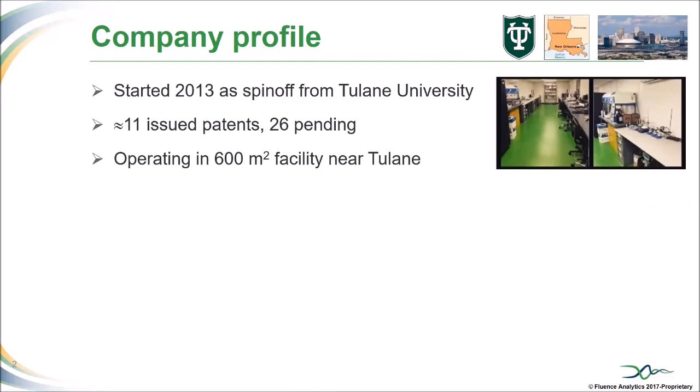So our profile, I've just mentioned a little bit. We do have the IP or the patents that were originally mostly developed in the Tulane period. Those have been obviously contributed to the company. We are in New Orleans, very close to Tulane University, just a few miles away. Our facility is about 6,700 square feet, and we have here a team of nearly 20 people working on all aspects of commercializing this technology.

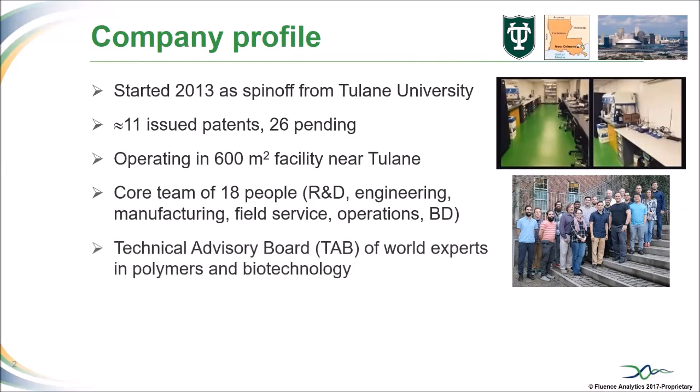Just to mention, because it's not on this slide, we also received a Series A funding round in May of this year, confirming strong investor interest in this technology. Really our mission is to combine a hardware system with advanced software and data monitoring, data processing, analysis in order to provide solutions particularly for the chemical and biopharma industries.

So our products are intended to help you with productivity. I'll just mention we have two main product lines, ACOMP being one of them. The other one we're not going to spend any time on today, except just to mention it right now. It's called ARGEN, which stands for Aggregation Rate Generator, and it's a laboratory instrument that has 16 independently controllable cells.

It uses light scattering to look at things like protein aggregation, or it could look at degradation of polymers, other natural products. This product is mainly targeted at the biopharma industry. So just a little footnote here to say that's one of our product lines.

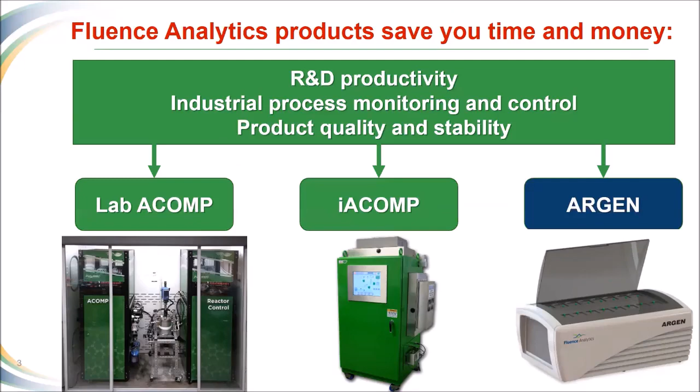So the main problem faced by the polymer manufacturing industry is really one of understanding what is happening, what is going on in the reactor, what you are making. As a matter of fact, I started my career more than 30 years ago now, and my first job out of school, I was involved in the rubber industry, and we would be running a measurement called the Mooney viscosity. So the way it worked is you would take your sample out of the reactor, run that over to the lab.

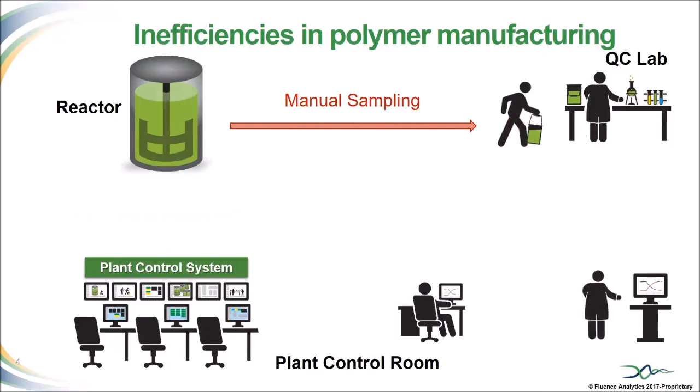You would then have the lab generate the measurement after a certain point, run that back over to the control room. And of course, this is a fairly inefficient way of really understanding what is happening. As it turns out, we are now in 2017, and nothing has really changed in this picture since that time - the Mooney measurement is run exactly this way by the rubber industry manufacturing polymer. So this is the inherent inefficiency that is very common in polymer manufacturing.

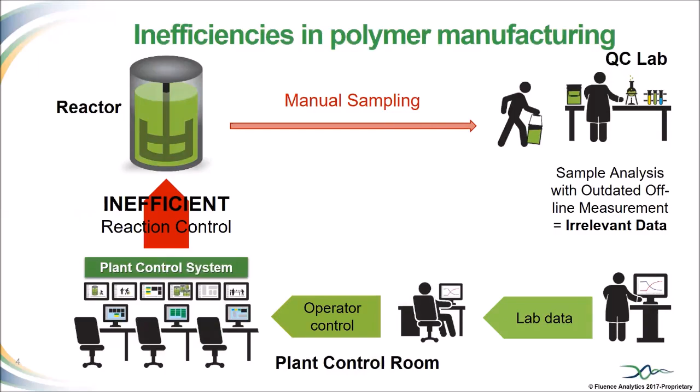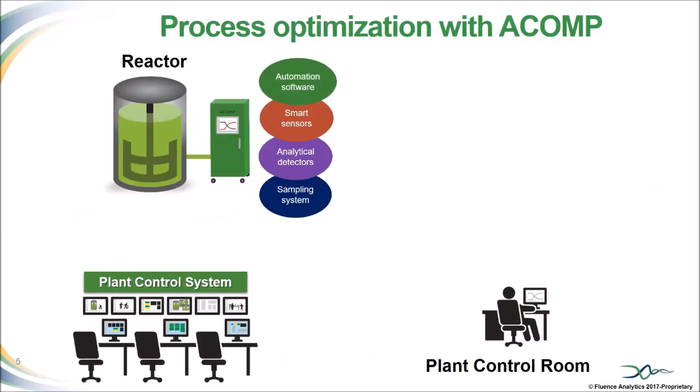So what does ACOMP bring to that? Well, ACOMP must be directly connected to the reactor, as we show here. And when that is done, using the internals of the ACOMP - the sampling system, detectors, sensors, and software - we are able to generate continuously, automatically, and in very close to real time, raw data. That data is then processed using our internal algorithms, which are quite sophisticated, and that data can be supplied directly back to the plant control room, the parameters of interest, whether those be a residual monomer measurement, for example, or a viscosity measurement.

This can be fed back directly into the distributed control system in the plant. So that entire process gives you greatly improved control or understanding of what's going on in the reactor, which can then be used to optimize your control. So the way I often like to talk about it is polymerization reactors are basically a black box, but when you have the ACOMP system, you have a window inside the reactor, and you can actually begin to understand what is happening there.

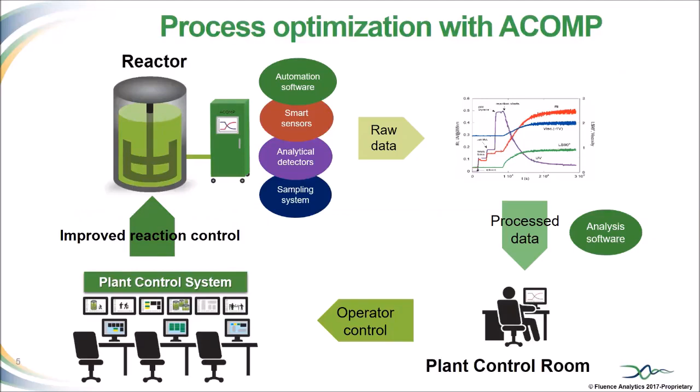So I'll just do the very basic version of how it works, because Mike will come to much more detail on this. ACOMP is, as I said, connected to the reactor, and we continuously extract, dilute, and condition a stream directly from the reactor, and then we pass it through the detectors at a very low concentration. So we dilute that stream generally by a factor of 100 to 1,000 to a low concentration.

Why do we do that? Because our detectors are all relying on the properties of polymers in terms of their interaction with light sources - whether UV or laser light or different types of light. So we need to have the polymers in a mode where they are fully diluted, not interacting with each other and not interacting with anything else that might disturb the signal. So we're really looking at very intrinsic properties of the polymer.

The typical extraction rate from the reactor itself is very small, of the order of a milliliter per minute, so very small quantity. There is some delay time inherent in the ACOMP because we have piping and tubing that extends from the reactor to the ACOMP and then within the ACOMP a little bit too. So there is an inherent delay time there, but compared to the time scale for sending things to the lab, which is a minimum of 45 or 60 minutes and sometimes can be many hours, the delay that is inherent here in the ACOMP is only of the order of 1 minute, maybe up to 5 minutes. So this is essentially real-time measurement.

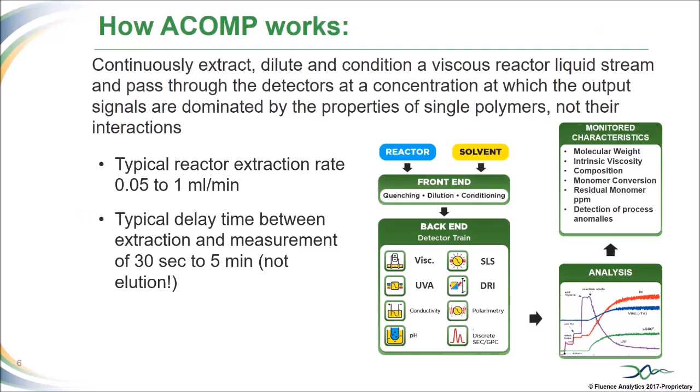We also want to point out, many of you in the audience may have a lot of experience with chromatography, so we want to say up front that ACOMP is not a chromatographic process. We are not putting the stream of liquid from the reactor through columns. We are putting it through the detectors directly, continuously, as I mentioned. So this is a definite difference between ACOMP and typical size exclusion chromatography.

On the other hand, if we wish, we could put GPC or some variant on the end of the ACOMP system. The actual stream that is coming out of the exit of the ACOMP is very suitable for GPC analysis, so that is possible to do, but it is not part of our standard offering.

Just a little bit of nomenclature - what we refer to as the front end in the ACOMP is the first part where we are extracting, diluting, and conditioning that sample, and then we call the detector train part the back end. We have 4 standard detectors, which are UV absorption and viscosity, and then differential refractive index. And our most sophisticated detector is actually the static light scattering that has been developed and improved by Professor Reed at Tulane and Mike Drenski and many people. So that is our most sophisticated detector of the 4.

And we can add other detectors optionally. We could add GPC, as I mentioned, but we could also add other things depending on the requirements of the customer and what you're looking for. So coming out of those detectors, again, we will get raw data, and Mike will explain that in a few minutes.

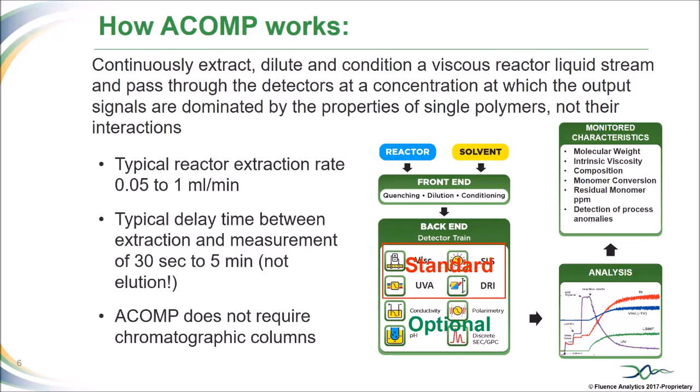Where we see the value of the ACOMP system, basically we like to break it down into 4 categories. We've actually done a lot of quite detailed work to quantify what we're going to talk about here, but basically the benefits, of course, cost.

If it's a batch process, we are typically able to reduce cycle times, and we have a case study to show you exactly how that's done. With continuous process, it's about faster grade changeovers. From an efficiency standpoint, of course, we are going to have less rework in the system, reduced manual sampling, really a lot less analysis is going to be needed if you have the ACOMP running. The data is fed seamlessly into the plant DCS system where it can be used to implement control algorithms directly.

So those are benefits. And then quality, likewise, by being able to control things like the cycle time or the transitions, you can envision having tighter specifications. Of course, you reduce the amount of off-spec product. In batch, we'll show you an example later where we basically avoid degradation when you run the batch reaction too long.

And then last but not least, for health, safety, and environment, we of course reduce manual intervention, so the operators do not have to be exposed to hazards in running back and forth collecting samples of reactor liquid. But overall, for a site, you can envision that using this type of analytical technology, you can reduce the energy footprint, you can reduce the materials consumed, and so there are significant HSE benefits as well.

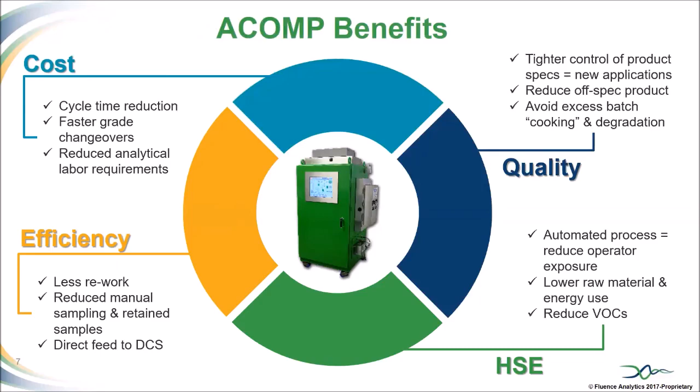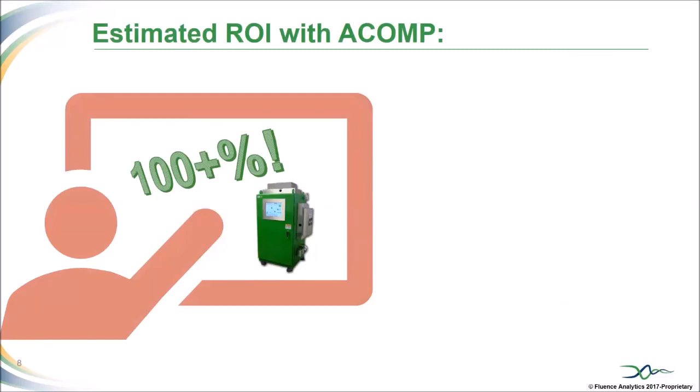So in terms of return on investment, we are going to make what will sound like a quite bold statement here. We believe that using this type of technology, you can quite easily, in fact, generate returns of over 100% return on investment annually, meaning that the payback is less than 1 year, typically.

And why we're able to say that, just to talk about two generic examples here. If it's a batch process or semi-batch, and let's say you have a 20,000 ton plant with a $50 million turnover, the major benefit, to focus on the major benefits, is going to be cycle time reduction, and we can say that it's possible to get on the order of $1 million.

And how do we arrive at that? Basically, if you have a 5% reduction in the batch cycle time and you're able to sell that capacity - it depends on the economic environment you're in, but if you're able to use that capacity - $50 million times 5% is $2.5 million, and then the cash margin, if the cash margin is 40%, that is how we get to that $1 million figure for the batch example.

Very, very straightforward. As I'll mention later, the batch cycle time can be improved by significantly greater than 5% in some cases. For continuous process, likewise, let's say you're running a plant and the annual turnover is around $150 million.

Again, your big nugget there is going to be reducing the transition time where you are producing what's called often twilight material, or basically off-spec grade in between two grade specifications. So if you can reduce that transition time by just 1%, you are looking at on the order of $1 million there. Oftentimes that transition material is sold for less than half the prime price.

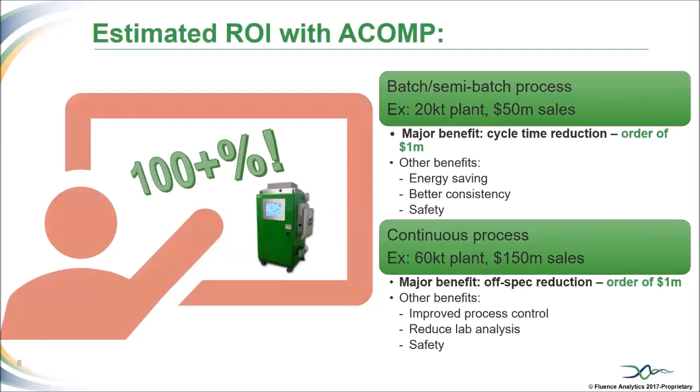So how about the actual industrial performance of the ACOMP system? ACOMP has been in business now for close to 3 years. Our reference example that we're going to share refers to a customer here in Louisiana. It's a global specialty chemical company.

It's making a polymer that is frequently used for water treatment. And we have, with the Generation 1 ACOMP, close to 3 years now of experience with 98%, or really close to full, on-stream availability, meaning whenever the customer is using it, the equipment is available. I mean, if they're down for cleaning or something like that, we don't count that time, obviously.

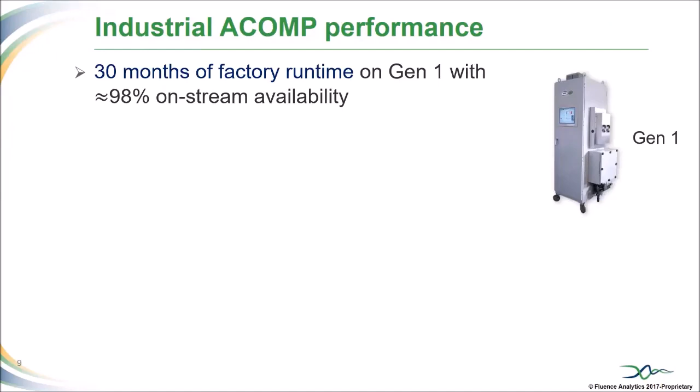Generation 2, so they were very happy with this. Payback was very fast, they bought another unit. This is the Gen 2, lower right corner there. And so they bought that unit, and that unit now has well over 1 year experience as well.

And although I mentioned in the example where you can get very significant savings if you can just reduce batch cycle time by 5%, we have gone back and looked at a lot of the customers' data, which is shared with us.

And we have estimated an average savings in cycle time of about 17%, so very, very significant. Now, the economic benefit of that saving is going to depend very significantly on what you do with that saved cycle time. In a very strong economic environment like we're in right now, you probably can sell all of that capacity. In a weaker economic environment, the savings would be reduced amounts of overtime, a little bit of reduced energy usage, and we have actually done estimates around those things.

So we are only using the 5% number to actually claim the very significant benefits for ACOMP, but the savings can actually be significantly greater.

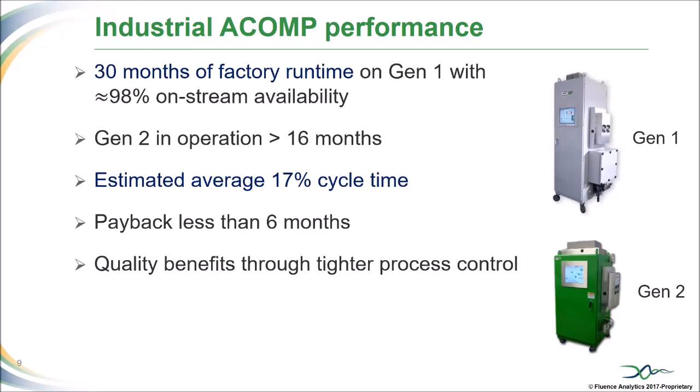So payback was less than 6 months in this particular case, and they also saw quality benefits through tighter process control, basically keeping the batch time uniform and shorter than the original batch time. And by the way, they are running something like between 15 and 20 grades, and every time they want to run a new grade, they will use the ACOMP to optimize that cycle time as well.

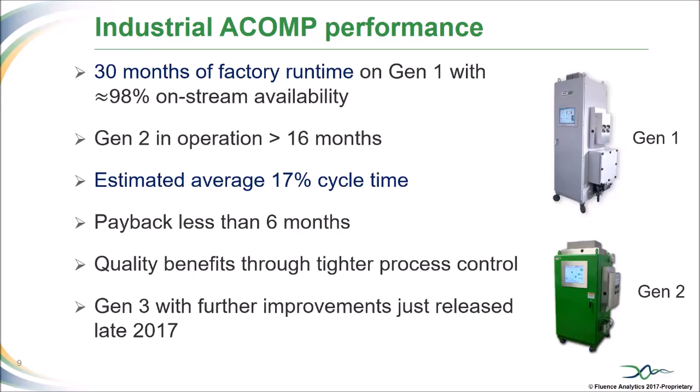So, I mean, we are coming to Generation 3. It's just been released. We had a press release just in the past week, and we've announced several improvements, which perhaps Mike will get into a little bit later. So I'd like to, at this point, hand off to Mike to carry on the presentation.

Thank you. All right, thank you, Sig. As Sig said, I'm Mike Drenski, CTO of Fluence Analytics. What we're going to look at now is some case studies, as well as I'm going to go over and describe how the data is collected and what we end up doing with the data from the system.

In this particular first case, we're looking at a batch process. This is a free radical terpolymerization of methyl methacrylate, butyl acrylate, styrene with a solvent of butyl acetate. The conditions are typically pretty straightforward for this type of polymerization.

But if we look at the beginning of the reaction process, we have pure solvent going through the detectors. There's really low signals here, but when we start to add monomer to the process and see that in the detector streams, we can see that the refractive index detectors start to increase because of the differential refractive index change.

The double carbon bonds from the UV absorption start to absorb in the detector, and we can see the signals increase accordingly. But what we don't see is the viscosity or the light scattering characterization going up because there's no molar mass being built up quite yet. So those signals don't quite show up here at that point.

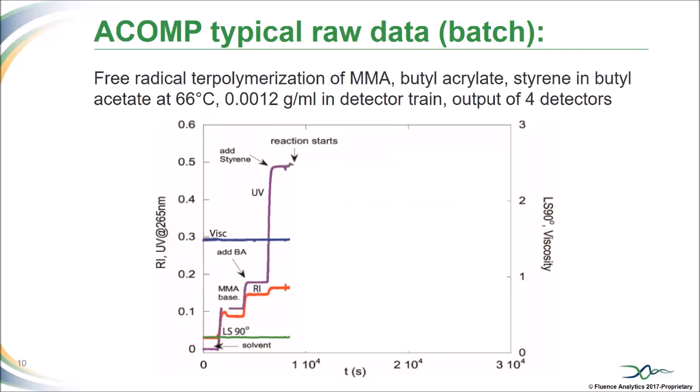At this point in the polymerization, we kick it off by adding the initiator at temperature so that the polymerization process starts. And what we see is the signals change accordingly. In this case, you can see the purple where the UV starts to drop down. And this is a function of the double carbon bonds being cleaved open and polymerized into the polymer chains.

The refractive index starts to go up according to the index of refraction of the polymer being higher than the monomer itself. And then you start to see the molar mass detectors, the viscosity and the light scattering signals increasing from there. So from the refractive index and the UV absorption, we can get the monomer concentration as it's being changed in time.

As well as the polymer concentration, in some cases being just the mass balance differential. Knowing the polymer concentration and then the effects of the molar mass detectors, we can get the molecular weight from that directly. That's the weight average molecular weight and the intrinsic viscosity. Now, from the intrinsic viscosity, if you know the Mark-Houwink equation and the parameters that go along with that, you can actually get intrinsic viscosity or molecular weight by viscosity as well.

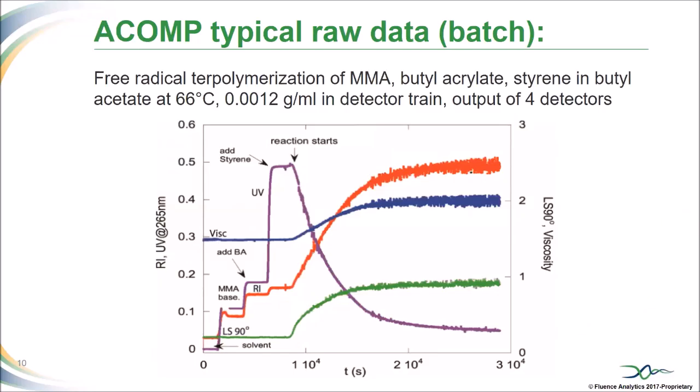Now, let's look at a couple of case studies. First case study is, as Sig mentioned, we have a system here in Louisiana that's been running for a few years, and this is a little illustration of how we end up with that 17% cycle time.

So if we look at the raw signals on the left, we see the blue being the UV signal being interpreted into monomer concentration, in this case ppm. The red signal itself is the intrinsic viscosity or reduced viscosity, in this case, pointed out in grams, centimeters cubed per gram.

Now, if we follow these signals from left to right, we see the solvent baseline, then we go to the monomer baseline where the absorption is much higher. As we start to polymerize, we see the blue signal dropping down. At the end of this polymerization, the blue doesn't actually reach the pure solvent baseline, because the polymer chains are so long that they start to scatter some light.

So what we end up doing is following the kinetics of the process, and we can actually fit a value to that kinetics and predict when they get to a ppm target. This is what the customer is actually interested in. They want to know when they reach a residual monomer target value so they can dump this product and start a new batch. Historically, they're following a recipe.

This recipe leads them to taking a sample at a specific time in the process, running that to the laboratory, waiting for an HPLC measurement to come back, which could take anywhere between 30 minutes to an hour. So what we can do is point out when they finish the process based off the kinetics of the process. The savings in time here, as you can see, is on the order of one to two hours in this particular case.

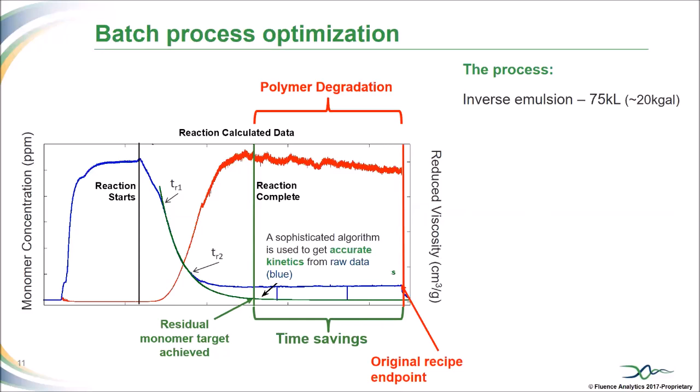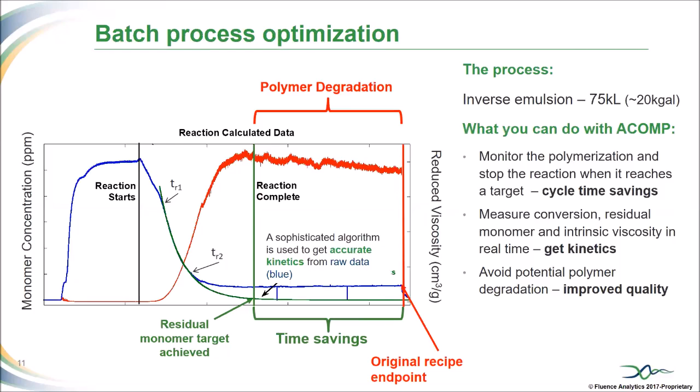So what this can give us is increased cycle time savings, so they can reduce the batch time and produce more batches in time. The kinetics of the process - they can modify the kinetics so they can increase the overall batch output by increasing the ratios of the monomer to the initiator, producing the right size products, and overall reducing the batch process. And then, like I said, improved product quality - there's no point in degrading your product, waiting on the process when you know that it's finished.

All right, so now the next case we're going to look at is a continuous process. This is a case study where we prove the idea of monitoring the process in real time. Imagine we look at a continuous grade transition for a process where you're running from, say, grade A to grade B - grade B on the right side, grade A on the left side. Properties here, we'll assume these are in Mooney values, and as Sig mentioned, that's a very standard value in the synthetic rubber measurements.

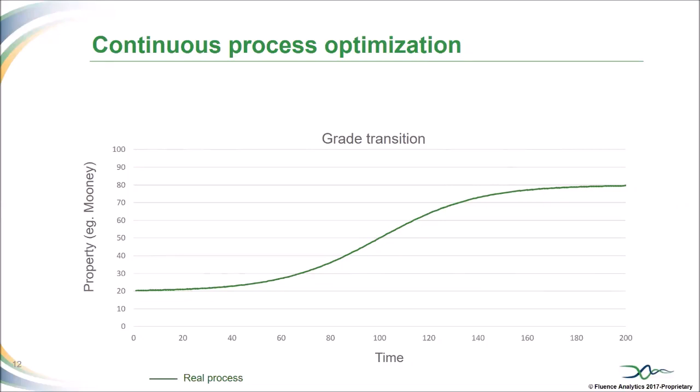Some of the assumptions we'll take here: assuming they're taking a sample from the process every 30 minutes, running it over to the laboratory, and it takes 60 minutes to get a process value back to tell what the Mooney value is. So as you can see from the red data points, there's a significant delay in actually determining what the product properties were in the process as it was taking place.

Now, what this leads to is the intermediate measurements are very poor for process control. This has been a known problem in the industry for long years, but they're working this way, and they see the value in actually continuous and online monitoring and characterization.

So if we look at what the case would be with ACOMP, as Sig mentioned, our typical delay times are anywhere from about 5 minutes of delay time from the process to the detector stream with a calculated value. So in the blue line here, we can see very little delay, very little difference between what the process is actually doing compared to what ACOMP is monitoring.

What this leads to is we know when we're in specification. So the green lines here on the right show the high and low values of the specification, and we can tell when we actually reach the specification, so there's no delay there. In this case, we point out there's at least a 2-hour delay based on individual laboratory measurements. That's 2 hours of product that's just going out and being pumped into a different tank, potentially wasted or processed into a different grade of product.

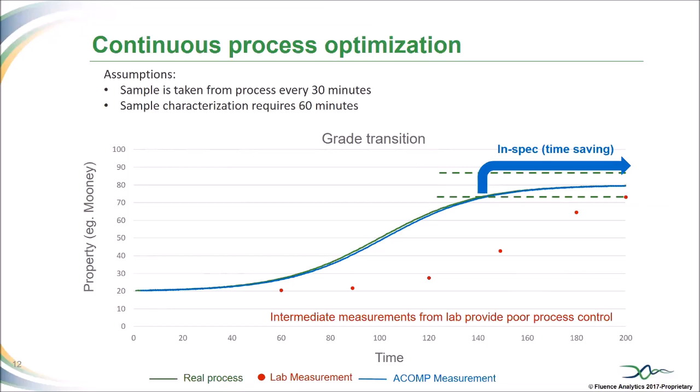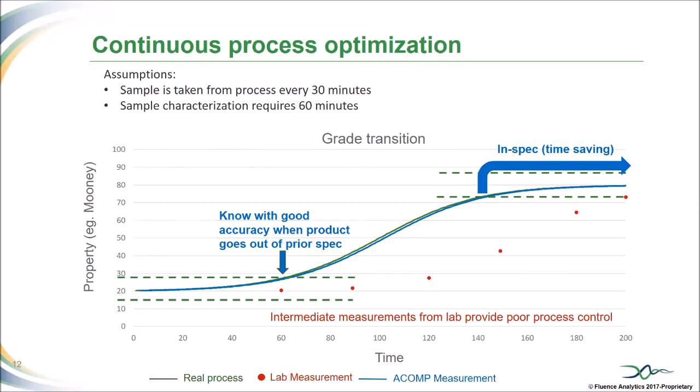What this also leads to is knowing when you've lost the previous grade specification, so when you're in this transition period. What this points out is that at this point we can stop collecting the previous grade A, take this intermediate batch product or intermediate process product, put that in a holding tank, and then know exactly when we got to start collecting the second grade.

In this particular case, we're going to show some of the more sophisticated things that we can do with ACOMP. This has actually been done in the laboratory environment at this point, but it's very exciting, novel work that we've been pushing for.

So in this case, we're looking at a batch process. This is a polyacrylamide process where we're actually doing a free radical polymerization. According to nature, free radical polymerization should start out with high molecular weight in the beginning, and as the monomer is consumed throughout the process, you get lower and lower, smaller and smaller molecular weight chains. So what we actually end up doing is knowing the molecular weight as it's being built up, we can adjust the monomer to initiator ratios so we can continuously build bigger and bigger molecule chains throughout the process. And that's basically against what nature wants it to do.

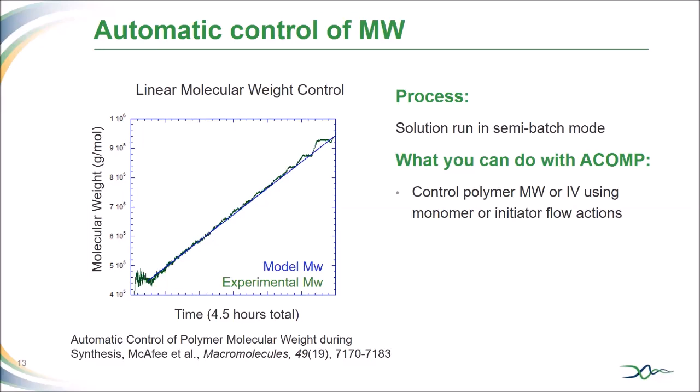So what we did is we took this blue line here. If you can see the model line, we call this our trajectory model. As we're monitoring the process in real time, we can adjust the molecular weight and intrinsic viscosity accordingly so that we follow this model value.

What this gives us is, as I mentioned, with the process that we use this characterization tool, we can actually go counter to the normal evolution of the batch process. So we actually build molecular weights up to what we want them to be, as opposed to what the kinetics, the reaction processes, and the true nature of the product actually wants to go towards. So we can actually make products based off of what we want them to be.

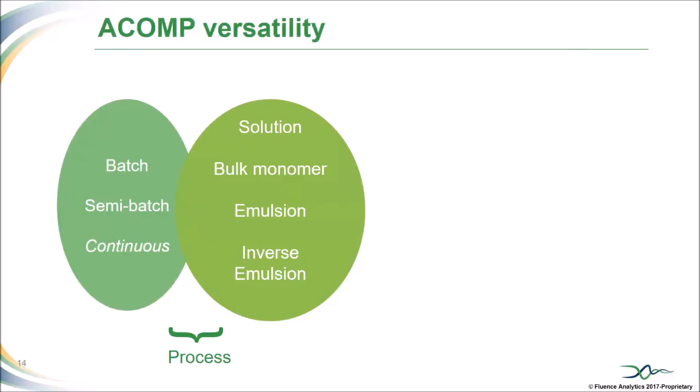All right, so now let's look at a couple of different versatility options for the ACOMP itself. We do have a lot of experience with batch, semi-batch, and some experience with continuous processes. And we've actually had quite a bit of experience in the laboratory with solution, bulk monomer, emulsion, and inverse emulsion processes. Our industrial systems are actually working in a little bit of each of these spaces themselves.

The chemistries that we've had quite a bit of experience with are anywhere ranging from acrylamides, acrylics, styrenics, urethanes, and things like that. So we do have extensive use of the system to characterize all these different types of properties from these different polymerization and chemistries.

But the more exciting things that we're pushing toward these days are the polycarbonates, polyesters, vinyl acetates, and silicones, because these processes have typically been a bit out of our reach at this point because of the high pressures and high temperatures needed to run these polymerization processes. But we're moving that direction, and we're actually having quite a bit of success moving that route.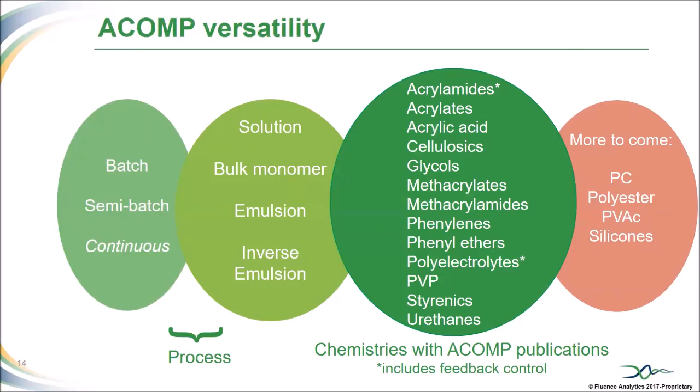So now we'll look at a couple of different options. As Sig mentioned, we have a couple of different options for ACOMP, laboratory and industrial. Laboratory ACOMP, if you look at them on the surface, they don't look entirely different. They come in a big box, but the difference really is in interfacing capabilities of the system and what they're designed to do. Laboratory and pilot applications for ACOMP give us all the same monitoring, concentration, conversion, molecular weight, and intrinsic viscosity values from the process.

It can be tailored to a particular type of chemistry. Maybe this laboratory researcher wants to work on basically all styrenics, so the system can be tailored specifically for that. All the software, automation, control, monitoring, analysis, and procedures are basically similar between the two systems because all the calculations, analytics, and everything come out the same.

What we do have here is customized report generation, review, and recovery of the data so that on a scientific level, the scientists can actually extract the data, take that to a third-party software, and do a higher level analysis on the data that we might not be conducting in the ACOMP software itself. We can collaborate on that level to develop those analyses and then add that as a feature or package that comes along with the ACOMP itself.

As for detectors, we typically use the viscometer, the light scattering units, the refractive index, and UV, but we have options for adding different detectors based on the chemistry, the applications, and the needs. And Sig pointed that out. We've had experience with polarimetry, conductivity, pH, and a few other different detectors. And as he also pointed out, the sample stream coming from the ACOMP is already basically diluted and conditioned for GPC.

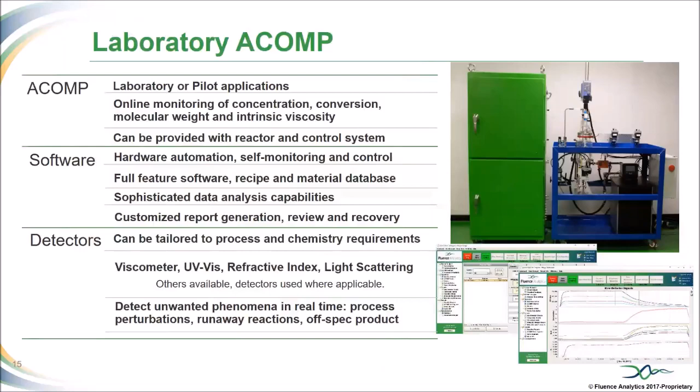So the main differences for the ACOMP designed for industrial space is it's climate controlled. It has an option for classification design, so it can be done in class 1 div 2 environments for explosion proof. The hardware and automation are basically very similar internally, but it has the option to integrate with the distributed control system and a historian so the data from the ACOMP goes to the plant's historian and is saved there.

It also has the ability to do very specific characterization of the process itself. So operators need to know when the batch is done, or when the viscosity measure meets a specific grade, so the ACOMP tells operators exactly what they need to know, as opposed to flooding them with a lot of information they don't need.

Overall, the detectors could be suited out with all 4 detectors available to us right now, but we would specify those down to only the ones needed for that process. There's no point in adding extra detectors that aren't needed - they don't give you any beneficial data from that process.

And this, at the bottom there, this is ready for deployment across a lot of different chemistries and a wide range of product processes and methods.

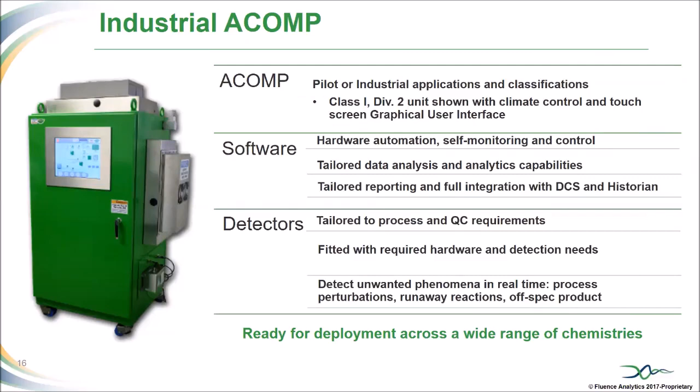So as the generations evolved over the years, we can take a look at a couple of different options here. The first generation of hardware was really built on a joint development - we worked together with the customer to develop the system specifically for them.

But the system itself has a lot of things built into it - over 50 sensors monitoring the health of the system, pressures, temperatures, currents, regulators, and stuff like that. So we always know what the system's doing, how it's performing. If it's starting to fail, we can go out and make sure it's fixed before anything happens to the system.

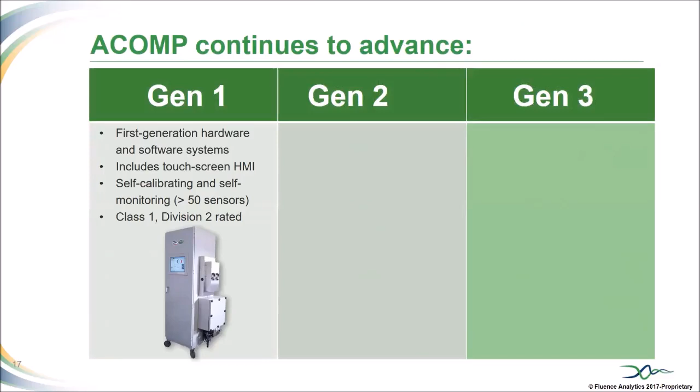Generation 2, we had smaller space constraints, so we made the system a little bit smaller - a reduction in footprint and size. The overall operator intervention, there's none now.

So it's built now tailored and slaved to the process. The operators running the process don't actually know the ACOMP's there. They're not doing anything - it just tells them when they're done.

We've also added the option for remote sampling, so we can put the sampling point very close to the process. And the ACOMP cabinet itself, as you see here, can be up to about 10 meters away. Overall, improved modularity of the detectors, sensors, and things like that.

Generation 3, the biggest advancement is now we have temperature and climate control of the fluidics. So now we address the solubility issues of some of these samples and polymers that are less soluble in different solvents - we have to keep the temperature raised.

This is very typical of GPC, raising the temperature up to about 45 to 60 degrees Celsius. So now we actually have the ability to control these temperatures within the ACOMP system to improve solubility and improve the accuracy and integrity of our values.

We've also added upgraded detector sets, so we now have proprietary detectors developed over the years, remote user GUIs so the user doesn't have to be near the system to operate, understand, and control what's going on with it. Our new chemical database and software structure gives us the ability to build in recipes and extract those over time as you need them.

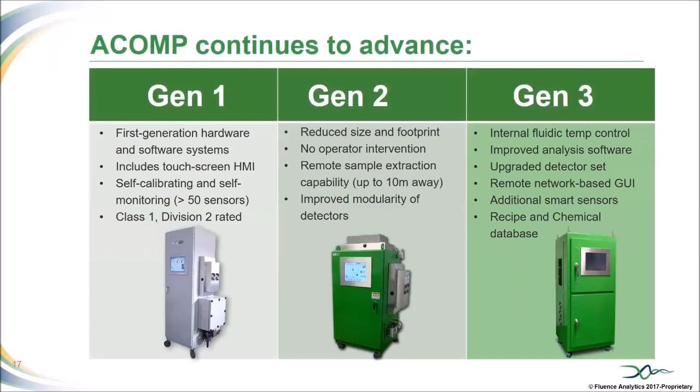Overall, I just want to thank everyone for their time and interest in the ACOMP systems.